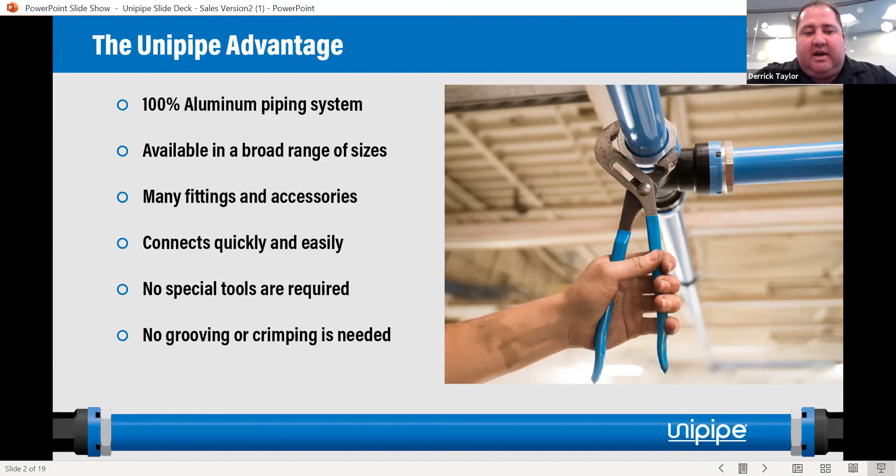A lot of the traditional systems, as well as other blue pipe systems available on the market, once you get over, I believe it's 2.5 inch, 3 inch, somewhere in there, and above, there's now special grooving we need to do to the pipe to allow the fitting to have something to lock onto. That's not the case with Unipipe.

Unipipe has also got the best working temperature, from -22 degrees Fahrenheit to +266. So this allows for installation in outdoor applications in many parts of the country. The +266 allows for installation in, say, paint booths that might have a bake cycle, things of that nature. Allows you a lot more flexibility for applications. We touched on the high pressure. This allows for applications in things such as bottle blowing, which is typically up to about 600 psi, and that is,

There we go. 1 second here. Is that better? Yep, no feedback now.

We touched on the bottle blowing. Allows for a lot wider range of applications. Another one is multi-fluid systems. You take car dealerships where they've got many different types of motor oil, transmission fluid, even windshield washer fluid, coming out to the bank of hose reels to be able to service automobiles, or even in the heavy equipment industry, servicing of tractors, combines. They all use this. It's traditionally referred to as multi-fluid systems.

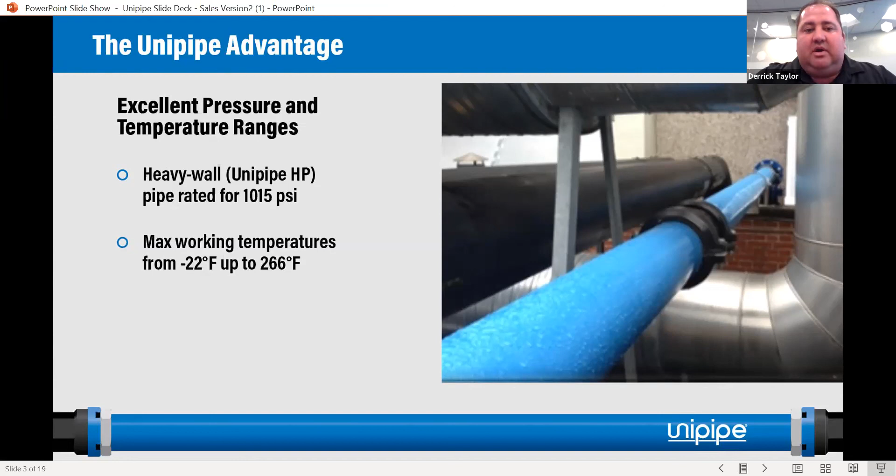So currently in stock, there's 4 options. There's the Unipipe Air, which covers the majority of the applications used for compressed air, but it can be used for anything. Any of the 4 options can be used to transport any of the oils, gases, compressed air, whatever it may be. The O-ring and the fittings are the same. Again, it's just that identifying ring you see there that we change to match the color of the pipe.

So for compressed air, nitrogen, high pressure demands, vacuum, any oils, coolants, anything that's compatible with aluminum, obviously, but then the O-ring or the seal inside of the fitting is HNBR, so we want to make sure we're compatible with that as well. We have had a couple of applications where we've changed out that O-ring to something a bit more aggressive due to a specific application, changed it out to silicone as an example.

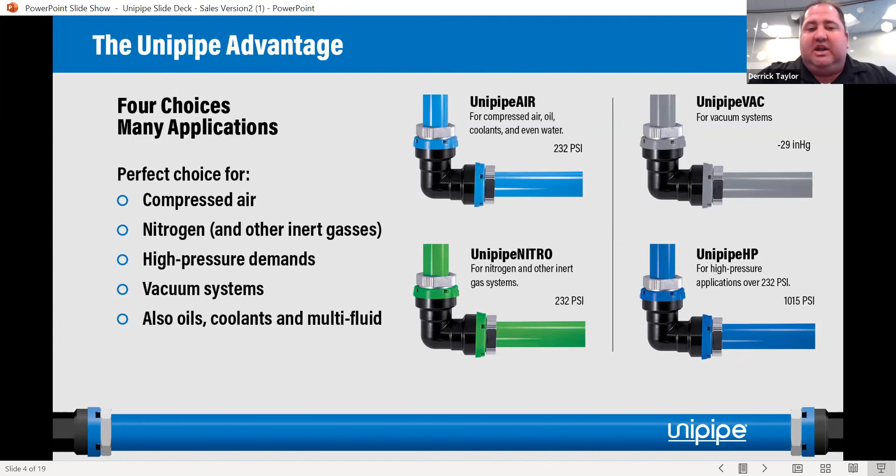We've got a vast array here of sizes available, from 3/4 inch through 10 inch. It's currently in stock in Chicago up to 6 inch, with 8 and 10 inch coming a little bit later this year. There are some unique sizes in here, such as the 5 inch, as well as the 3 inch 75 millimeter. These are not as common in the marketplace,

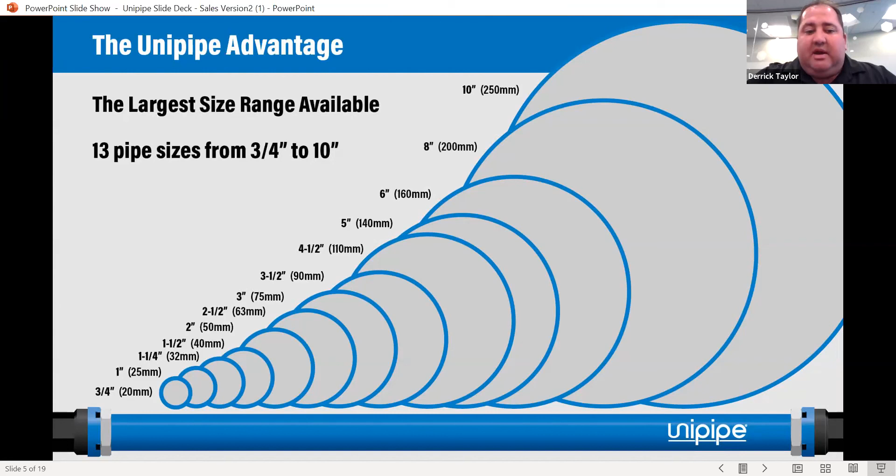but these are unique sizes that allow us to fill in between a couple sizes, which allows us to really meet the customer's specific needs, both now and potentially down the road. By having a size that is ideal for them without skipping sizes, so to say, allows us to be more competitive and get the customer the system they need with no pressure drop now, as well as far as they can see into the future.

This protects it, as the nut is what really is holding the pipe into the fitting, or it's securing the grip ring, which is holding the pipe into the fitting. So by protecting that nut inside the fitting, there's less likely to be a failure if anything's ever hit. We know in many applications where these systems are installed in manufacturing facilities, fork trucks driving around, all kinds of things can go wrong at any given time. So we want the most robust system we can get.

Another question we get a fair bit is, how long are the O-rings guaranteed for? Or when would I expect to have to replace them? And the answer is we would never expect you to have to replace them. The few things that cause O-rings to go bad are exposure to sunlight, excessive heat, or outside of the rated capacity of the O-ring material, and then movement, none of which are present in this application where the pipe is secured into the fitting.

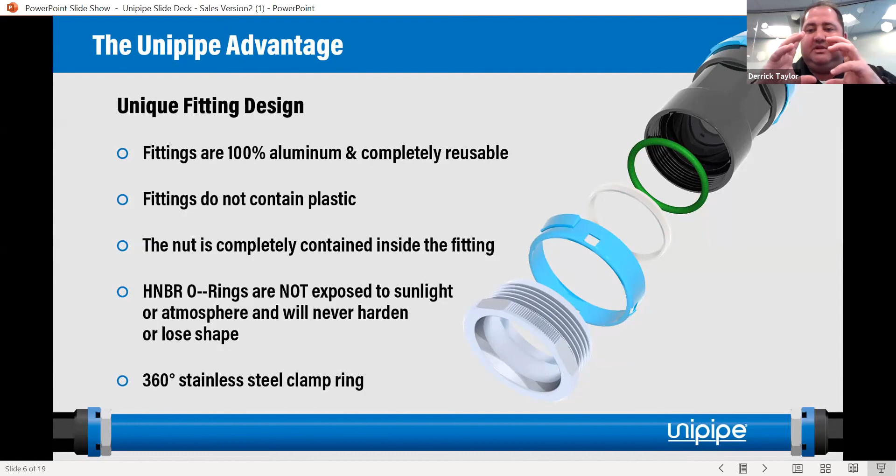You may be familiar with the SharkBite type technology used in a lot of water lines and such, where it's approved in different areas around the country. But that's got some stainless steel fingers that grab onto the pipe. And honestly, those fingers are really gripping into the paint as much as they are anything else. We've been told that if the pipe wasn't painted the way they are, those fittings would not grip on as well as they do. So that's not the case with our fitting.

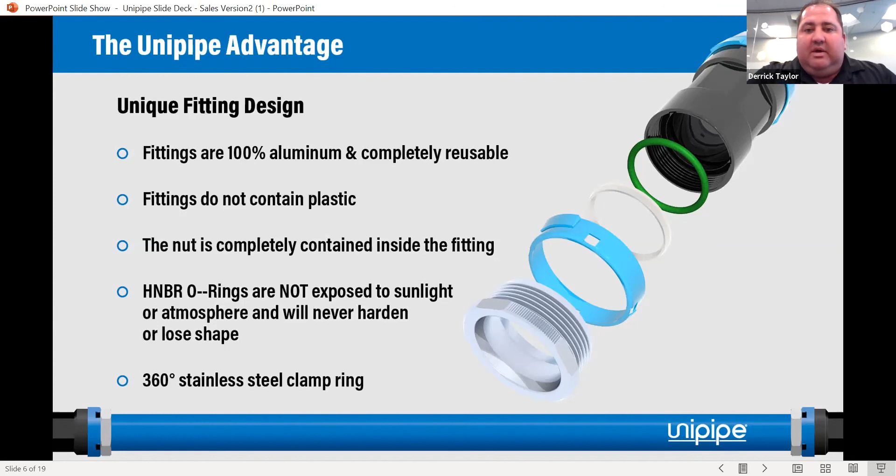The reason it's stainless steel is so that it's harder than the aluminum, and it will actually bite right into the aluminum pipe. There'll be some photos which I can show you on that in just a bit. The Unipipe fittings, because they're 100% aluminum, they're not only lightweight, but they're very strong. And because of the mechanical connection you have between the fitting and the pipe, we're not going to have pipe sagging if we don't have hangers within a couple feet of every joint.

So where you'll experience a potential failure is when pipe is not properly supported and it starts to sag near a fitting and it doesn't allow for the fitting to grip onto the pipe the way it should. That's less likely to happen with the Unipipe system because of the mechanical connection, and it's very robust when it's installed. So it's very easy to modify and add drops. You can change an elbow out to a T in a matter of seconds, especially on the smaller stuff.

And when it's easy to modify a system like that, typically you'll see the modifications are done correctly, if that's the right way to say it. Instead of running hose back on the pipe, if we can simply drill a hole into the side of the pipe and add another outlet, because it's so easy to do, it's done properly.

Are there any questions or anything we need to answer at this point? Okay.

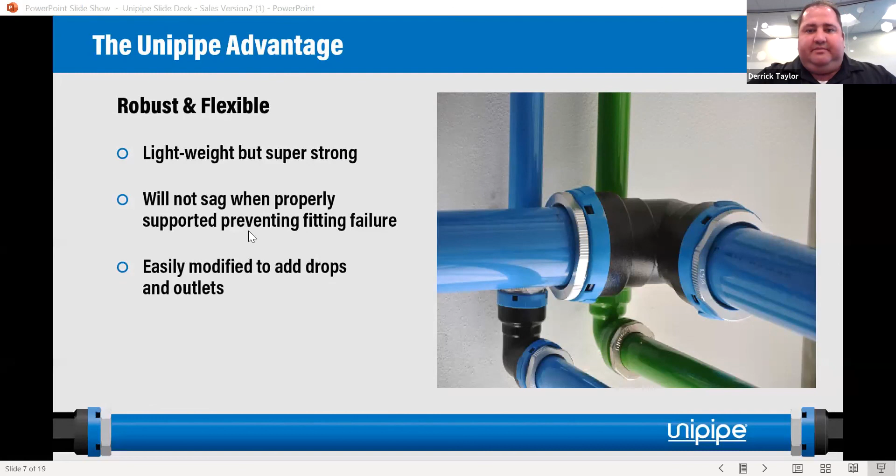So we touched on this. It requires fewer pipe supports. One of the key things with hanging pipe, nearly half the battle is putting up your pipe supports. And some of the other blue pipe systems on the market require that a pipe support is installed within 3 feet of any direction of a fitting.

So imagine a T, for instance, you would have to have a pipe support 3 feet of either side of the run, and then 3 feet of the branch side as well. If you don't install the pipe supports properly, the warranty is void.

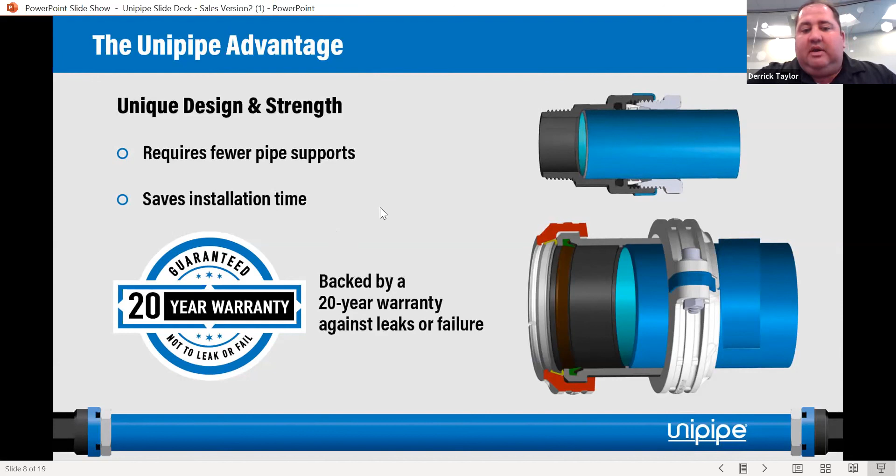Again, the Unipipe system with the integrity of the fittings, all we suggest is that the piping is installed in a similar fashion. Pipe supports are installed in a similar fashion the way you would any traditional pipe system, such as copper or black iron. And that in turn saves a lot of installation time. As we touched on, we've got the 20-year warranty against leaks or failure. So here we've got just a quick video that shows the installation of a few different aspects of the system.

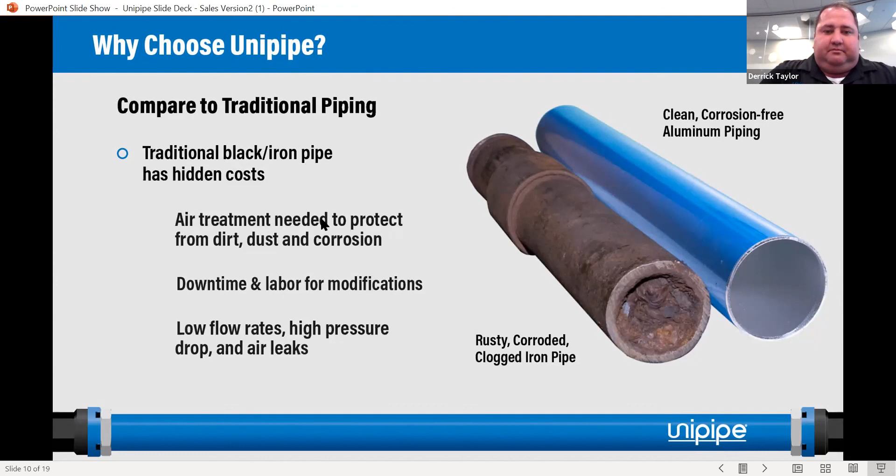So obviously, another point here we'd like to make is the smooth bore of aluminum piping. This is an extruded aluminum pipe, so it's very smooth on the inner bore, which translates to a very smooth airflow, very unlike what you'll see in iron pipe, which causes a turbulent airflow, which promotes pressure drop. So you might have, in a more extreme application, a slightly smaller inside diameter aluminum pipe which flows more air than a slightly larger inside diameter traditional iron pipe would. So that translates to less pressure drop, and pressure drop can be very expensive in compressed air systems.

So it's less likely to corrode, obviously, as we've seen, less likely to leak. Anywhere you do have a leak, once again, it's usually due to an installation issue where we nicked an O-ring or something happened there, but it's so easy to fix it. Unlike perhaps unthreading fittings, resealing them up, or potentially welding fittings back together.

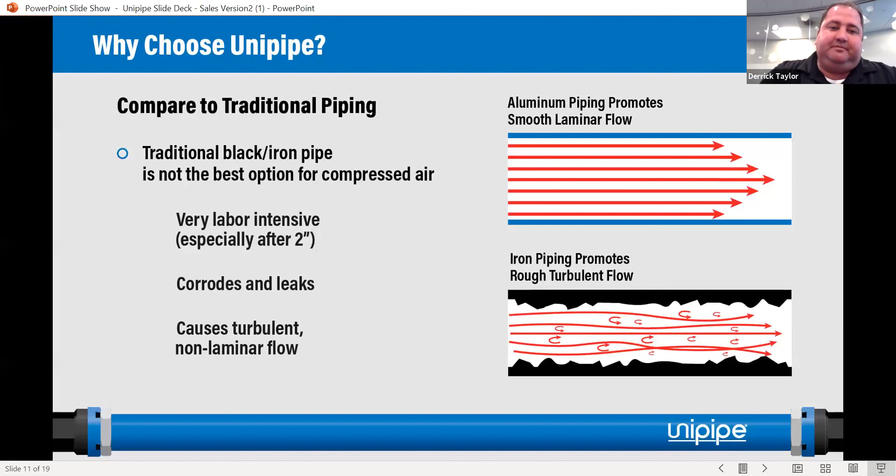So I believe the poll we took at the beginning of the presentation, a lot of you felt that copper was the best application for compressed air piping. And I'd say it's the best comparison when comparing to aluminum, because a lot of the benefits of copper or aluminum are the same. And that mostly has to do with the air quality that you're going to get from where you're generating the compressed air to your point of use.

Copper is not going to corrode the way black iron will. And that's typically a reason why people prefer copper. But copper is very expensive, just the materials, even more so as of lately. Copper raw material goods have doubled in the last 12 months. But it's also very time consuming to install, unless you use the copper ProPress system, of which then it's more expensive for the materials. But whether it's brazed or pressed or soldered, the fittings are not reusable.

So that's one of the key advantages to Unipipe: when you're doing modifications, Unipipe is much easier because you can disassemble fittings and reuse them. Again, for instance, changing an elbow out to a T in just a matter of seconds, or even on the largest size, a matter of minutes, saves a lot of time and money. And then reusing that fitting.

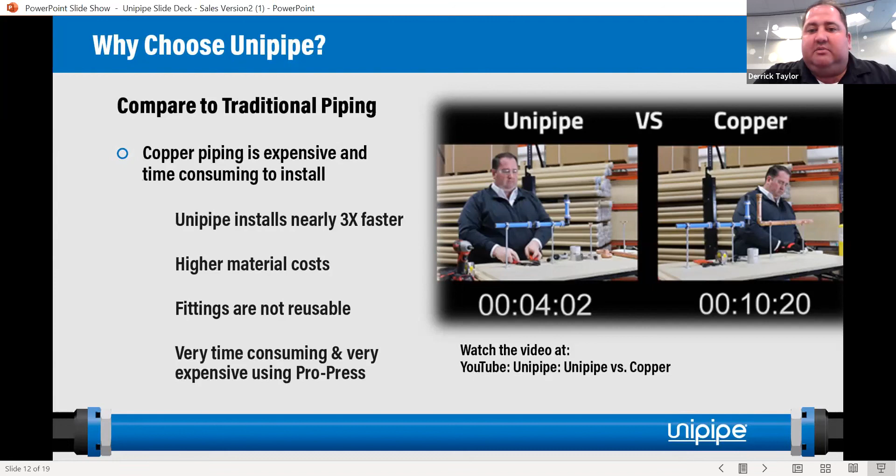And really the way it works is as the pressure increases, that grip ring is only going to become tighter in there because of the way the bevels are cut on the nut and the grip ring. As the pressure increases, they just lock together tighter and tighter. So pretty simple technology, but very effective.

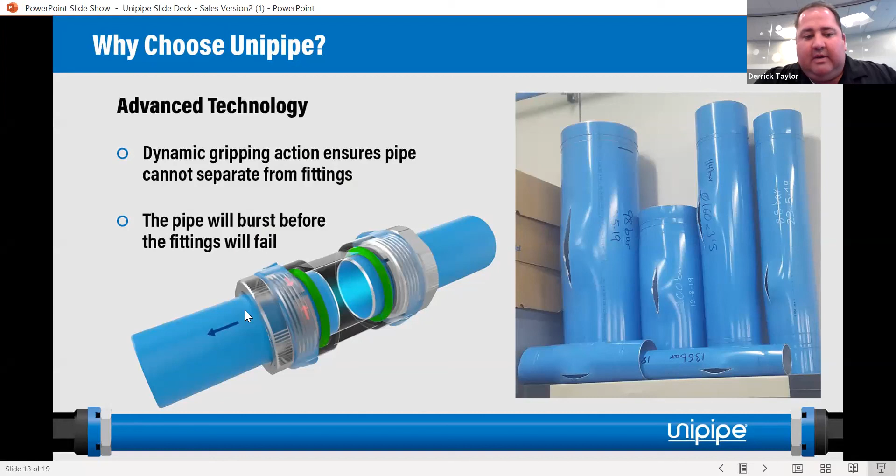Well, I'll tell you what happens here. The pipe broke out here, just like what we've seen in those previous photos, at right around 2,700 psi. So it's quite impressive. The fitting never moves, never slips, never fails, and the smaller diameter pipes obviously go to a much higher pressure before they fail compared to the larger diameter ones like we've seen on the previous slide here. Again, those are all larger diameters. So imagine the smaller diameters like we're seeing down here, 136, and I believe that's probably still a 2-inch pipe right there. The 1-inch pipe just goes that much higher.

Try one last time. Sorry, folks. But again, just a testament to the quality of the fitting and how securely it fastens on there.

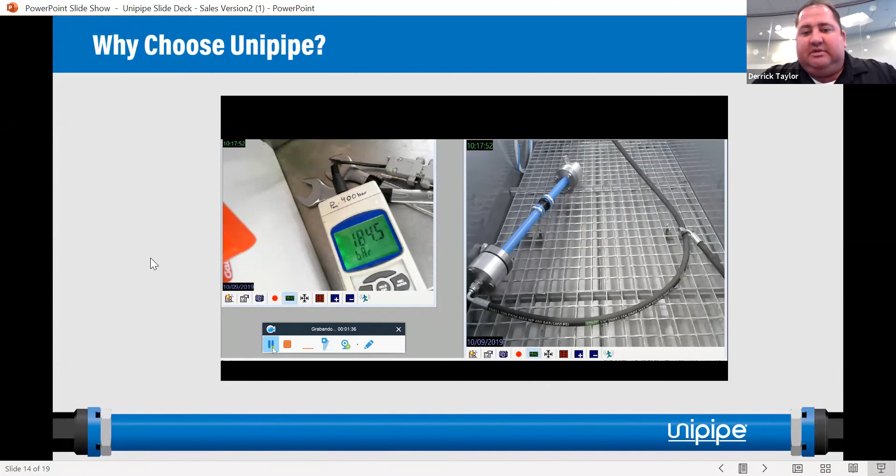So again, when compared to other blue pipe systems, we've got the most secure joints. And that's due to our proprietary grip ring design, which is just this ring right in here. They're 5 times more secure than other systems. The burst pressure, according to ASME, I believe has to be 5 times higher than the rated pressure. And we're beyond that, especially on our standard air system. We're well over 10 times on the 1.5 inch system and below.

So we've got a very good differential there on the working pressure to burst pressure. Industry leading, actually. So that really helps with the end users and getting their confidence levels up on a system like this compared to traditional piping systems. Because of joints like this, it really helps us with a much wider range of opportunities that we can cover.

Again, with the multi-fluid systems, high pressure nitrogen systems, running laser equipment, bottle blowing applications. All these are available to be done with the Unipipe system, whereas with any of the other blue pipe systems on the market, that's not an option. Traditionally, those systems are good for somewhere around 200 psi and potentially even less as the diameter increases.

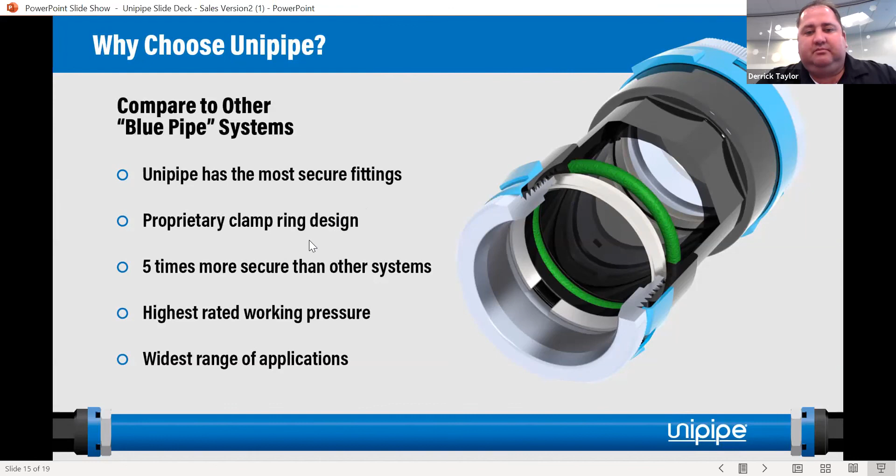One of the other things I wanted to just touch on is we had a situation even just recently. The customer did not want to even consider using a blue pipe aluminum piping system for their compressed air because his budgets were tight. At the end of the day, the customer ended up getting quotes from multiple sources for black pipe, which in his mind was going to be the lowest cost, and in this application, all his quotes came back at over $100,000 to do this particular install. The blue pipe system came in at just under $70,000.

So it's something we've battled with over the years, this misconception that blue pipe is more expensive. Well, with the cost of labor rising and the cost of iron and copper having gone up, aluminum has as well, but not as much proportionally, the raw materials compared to the actual end product. What I mean by that is the weight of the materials compared to the machining and whatnot that's gone into the fittings. That seems to be lower when compared to iron pipe.

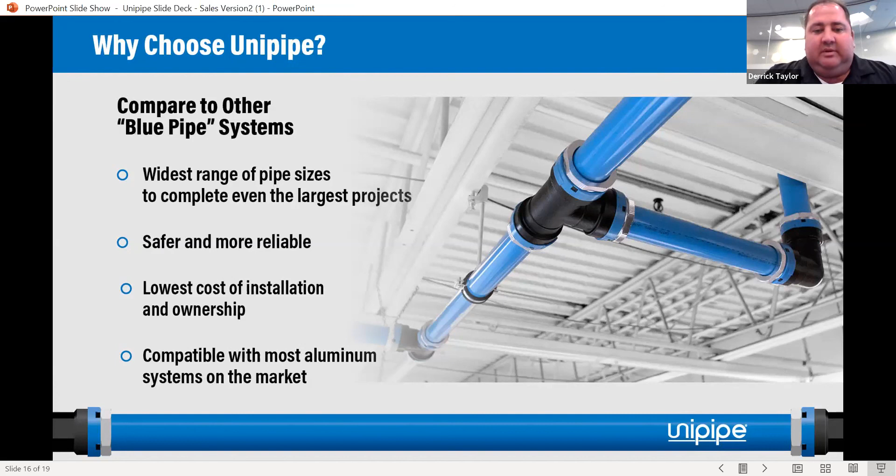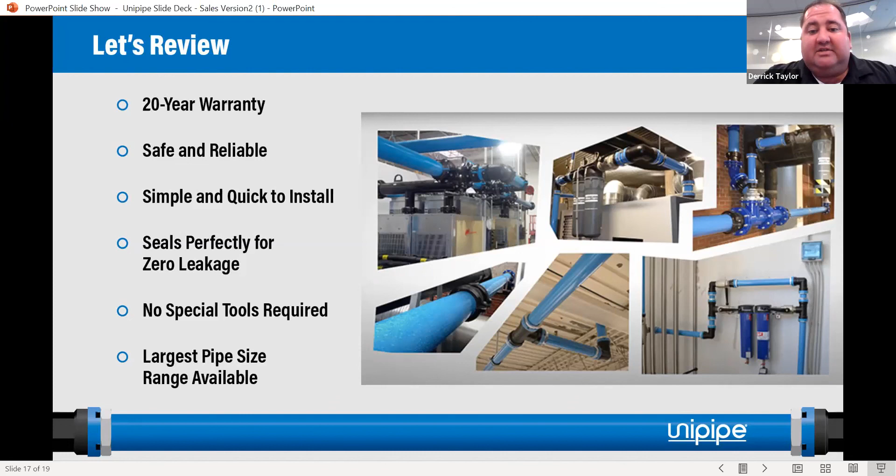So if the project can be done with aluminum, there's a better chance we can do it properly with Unipipe and do it faster and more cost effectively when compared to other options on the market.

So we've got a demo kit that you're free to request. Got some of it here. Kind of looks like this, as you can see on the screen. It's got a few pieces of pipe in there. I can just demonstrate real quick, but the fittings come assembled like that. There's no reason to pull anything apart. The grip ring is inside there, the O-rings, everything's assembled.

You simply push the pipe into the fitting on both sides. You would go hand tight, and then the demo kit comes with a small wrench, but you can tighten it up just a bit further on either side. And that's done. This is not going anywhere. I would put this just like that right into our pressure test chamber, and I guarantee you this fitting would not fail, and the pipe would fail somewhere north of 3,000 PSI.

But then for disassembling it, it's just like that as well. Loosen the fitting, just kind of unset that grip ring a little bit by giving it a slight wiggle or even just pushing it back together, and it unsets. And you can very easily disassemble the product and reuse the fitting, change an elbow out to a T or something of that nature, and you've got yourself a fitting that can be used anywhere else. So it's very simple, very clean.